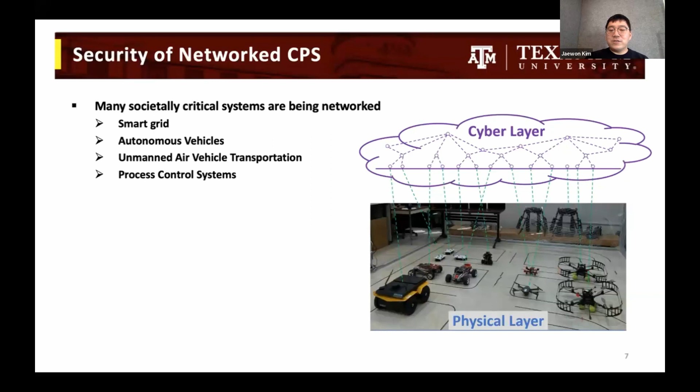So here are some examples of cyber physical systems. For example, autonomous vehicles, chemical process control systems, unmanned aerial vehicles, and even solar PV power systems. Many systems are cyber physical systems. Okay, so security of cyber physical systems. Why is it important? Many societally critical systems are being networked, such as smart grid, autonomous vehicles, unmanned air vehicle transportation, process control systems. They are safety and economy critical. So malfunctioning causes considerable physical and economic damages. That's why security of cyber physical systems is very important.

Actually, there have been many attacks in the real world. The prominent one was Stuxnet, 2010, and Ukraine Power Grid, 2015, Ohio Nuclear Plant, 2003, and Shamoon malware, 2012. So how can we possibly secure cyber physical systems? So here are many recently reported cyber attacks in the real world, such as Stuxnet and Black Energy. Black Energy is actually the cyber-induced power outage in the Ukraine power grid. The attacker used malware called Black Energy. They compromised three power utility companies, leading to power disruption in the region for half of the population.

And most recently, the Colonial Pipeline cyber attack, which is ransomware infection, paid $5 million and increased gasoline prices, something like that. So that's why cybersecurity is very important.

Okay, so abstraction of networked cyber physical system. The overall system has a physical system and actuators and some sensors and some routers and computational nodes, information fusion node, and they are connected over the network. However, some of the nodes may be malicious, may be compromised. So how do we secure the overall cyber physical systems?

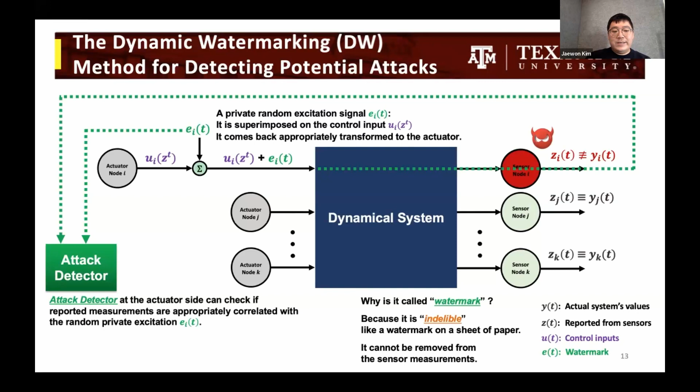So let me give you an example with the single input, single output equation. Here is the system equation with the system noise. So x(t+1) equals a x plus b u plus some noise. And then we are injecting the watermark onto the control input ut. So the new control input will be ut plus et. Then the closed loop equation we can write like this.

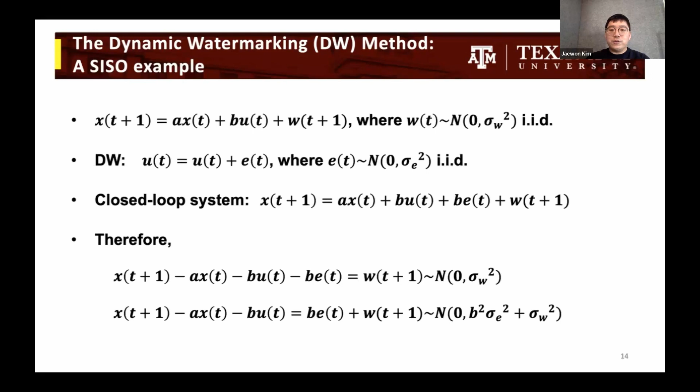And then we can reorganize this equation two different ways. The first equation has the watermark on the left side, and the second equation has the watermark on the right side. So we will use the first equation for test 1 and the second equation for test 2. So like this. In the absence of an attack, the first equation should be equal to the system noise variance, and the second equation should be equal to the system noise variance plus the watermark variance. So if either test fails, then there is malicious sensor information in the system.

So after detecting an attack, the system should go into safety mode: halted, rebooted, manual operation, etc. And there is a trade-off for setting the detection threshold. If we set a high threshold, it will result in more missed alarms, and if we set a low threshold, it results in more false alarms. So we have to carefully choose the threshold setting.

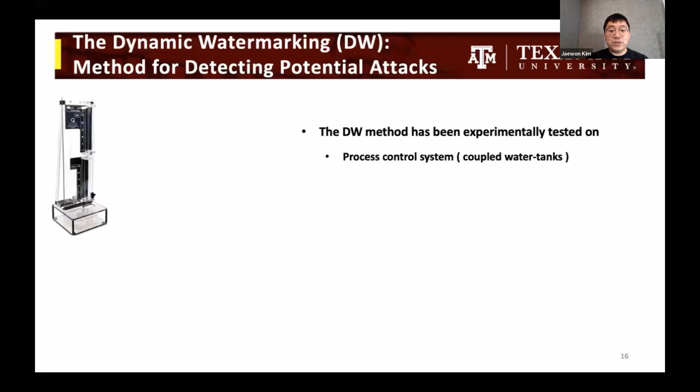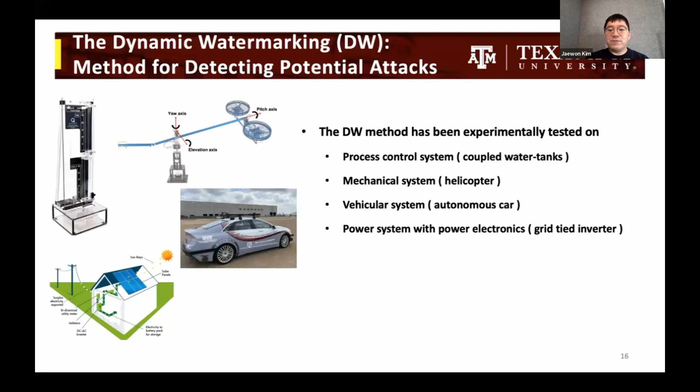Okay, and then this dynamic watermarking methodology has been experimentally tested on process control systems, a mechanical system, in this case a helicopter system, a vehicular system, an autonomous car, and also a power system with power electronics, which is a grid-tied inverter system. The benefit of the dynamic watermarking methodology is that it is a general purpose proactive methodology for defending control systems against any cyber attacks.

Okay, so from now, I'm going to show the experimental test demonstration. First, give me a second. I will talk about why we need experimental testing first. Because experimental testing is very important for this dynamic watermarking method. So why do we need experimental testing? Because dynamic watermarking is fundamentally based on stochastic considerations.

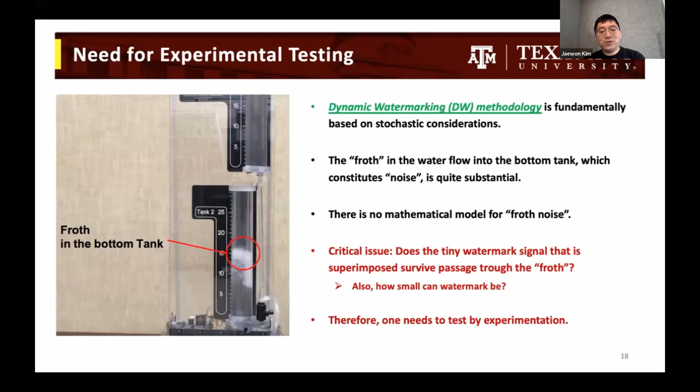Here is the picture from the process control system testbed. The froth in the water flowing into the bottom tank, which constitutes noise, is quite substantial. You can see it in this picture. And there is no mathematical model for this froth noise. Also, a critical issue is, does the tiny watermark signal that is superimposed survive passage through the froth? Also, how small can the watermark be? Therefore, one needs to test by experimentation, not by simulation. And there are also other reasons why we need to do experiments.

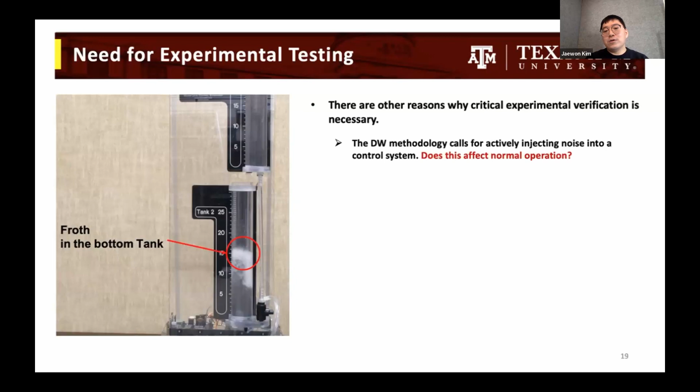First, the dynamic watermarking method calls for actively injecting noise into the control system. We have to check: does this affect normal operation? And also, the lower the variance of the signal employed, the longer potentially is the time to detect an attack. So what is the trade-off between missed alarms and false alarms? And what is the detection delay?

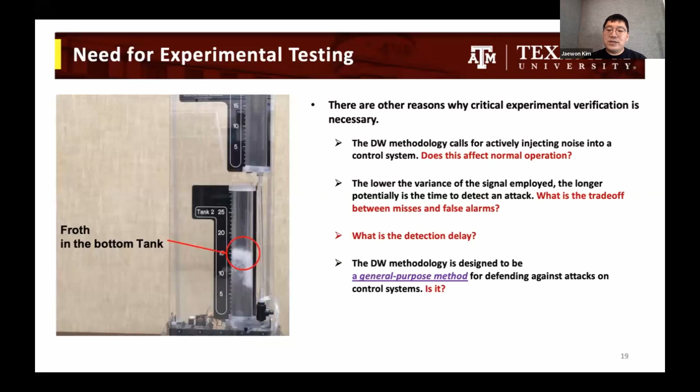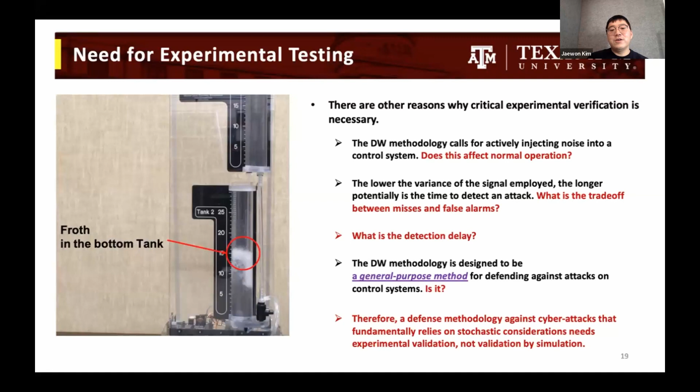And the dynamic watermarking is designed to be a general purpose methodology for defending against cyber attacks, any attacks on a control system. So we have to check: is it general purpose? Therefore, a defense methodology against cyber attacks that fundamentally relies on stochastic considerations needs experimental validation, not validation by simulation. So that's why experimental validation is very, very important.

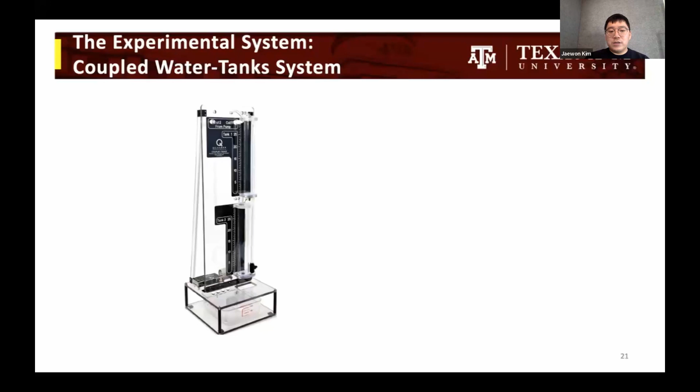Okay, so the first example I'm going to show is the process control system. The experimental testbed is a coupled water tank system. Two tanks are coupled, and there is a water pump here. The water pump feeds into tank 1, which in turn feeds into tank 2. So input water flow goes to tank 1, and tank 1 feeds tank 2. The testbed controller is designed to regulate or track the water level in tank 2.

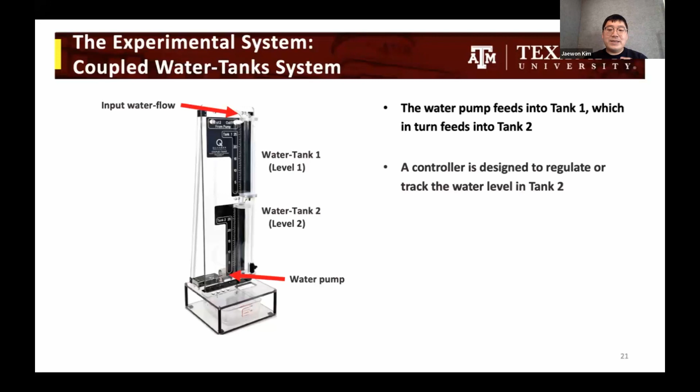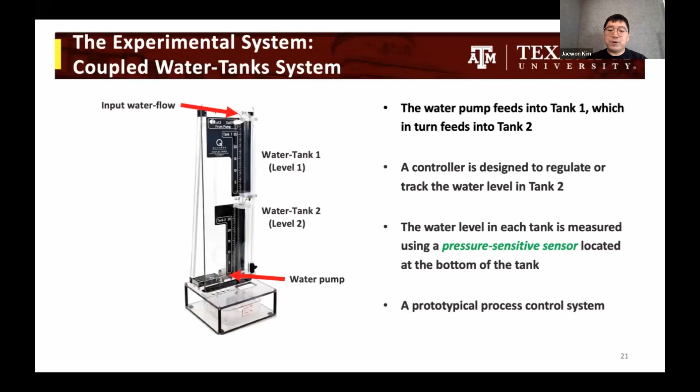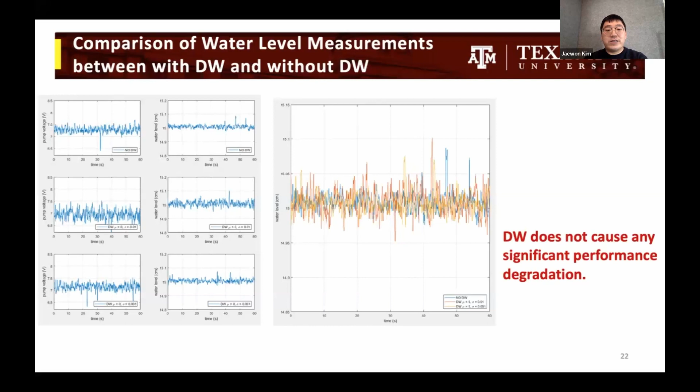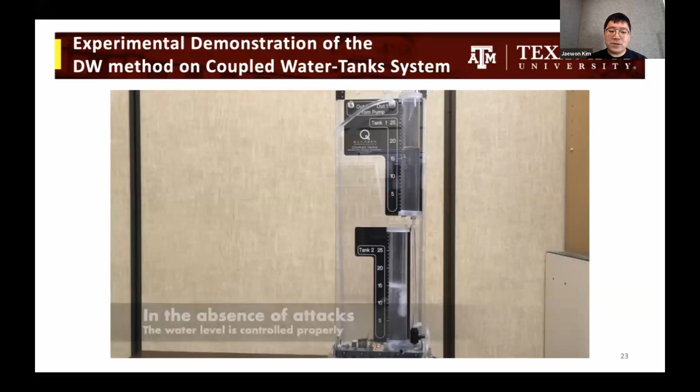And then here is the video I'm going to show. So we are right now initiating the plant. The set point is 15 centimeters at the bottom tank. In the absence of the attack, the water level is controlled properly. And then the attack happened here, but the system doesn't know without any defense methodology.

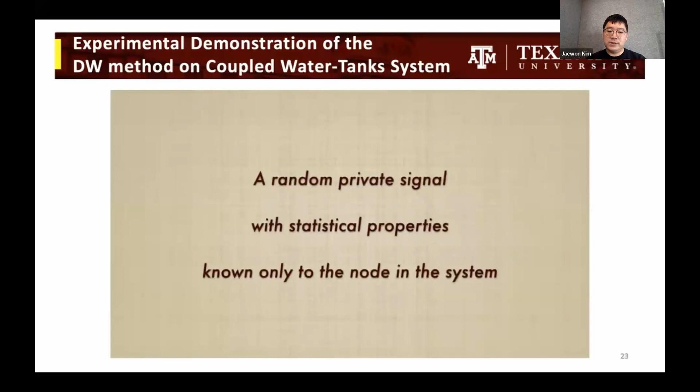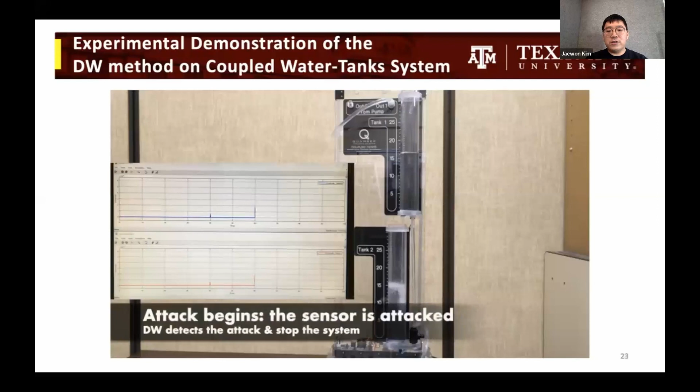And then dynamic watermarking test 1 and test 2 are running in real time here. Once the attack is detected, we stop the whole plant and drain all of the water for safety.

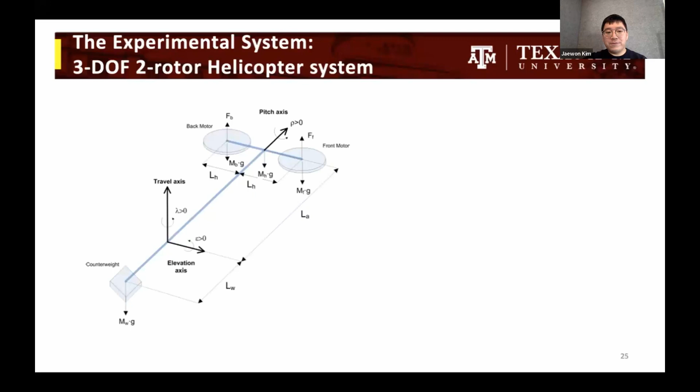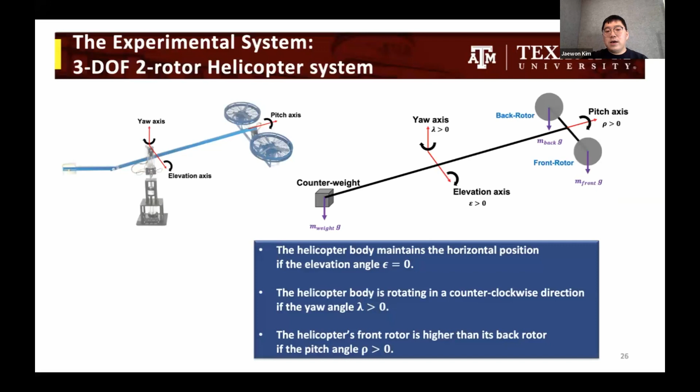Okay, second example: we tested on a two-rotor aerial vehicle flight control system, consisting of two rotors, a front rotor and a back rotor, which is exactly the same architecture as the Boeing CH-47 Chinook helicopter. It has 3 degrees of freedom: pitch axis, elevation axis, and yaw axis. And we attack the elevation measurement.

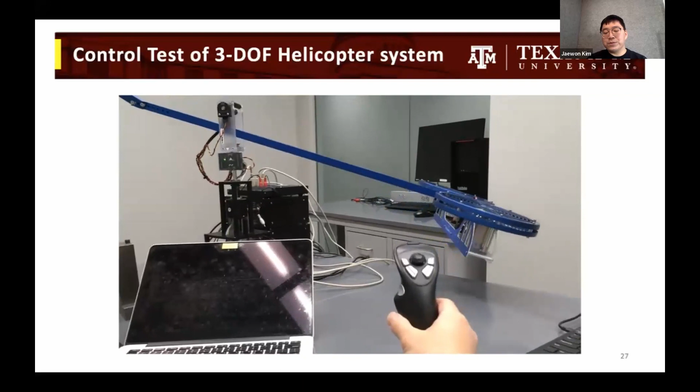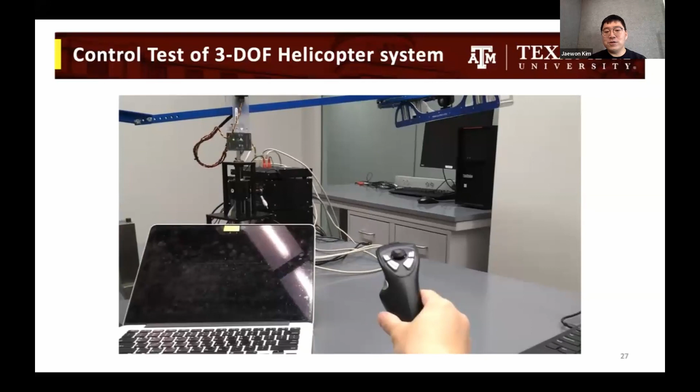Before we attack, we tested with manual operation, with manual control input. We connected a joystick to test the manual control input to the plant. Then we can understand how much input is needed for the helicopter. Something like this, then forward, then backward, then takeoff and landing. Yeah.

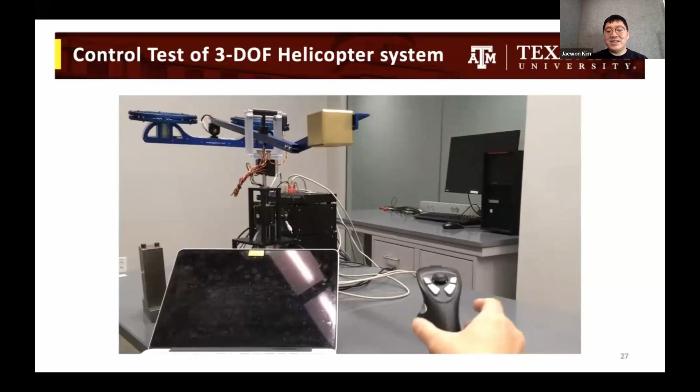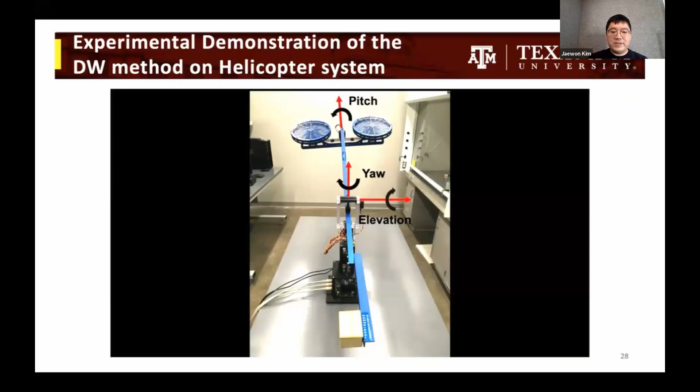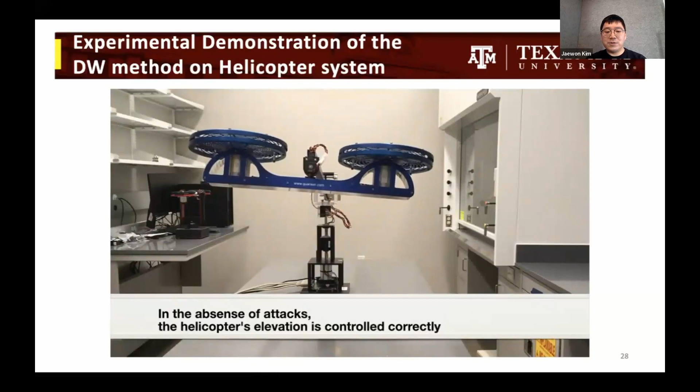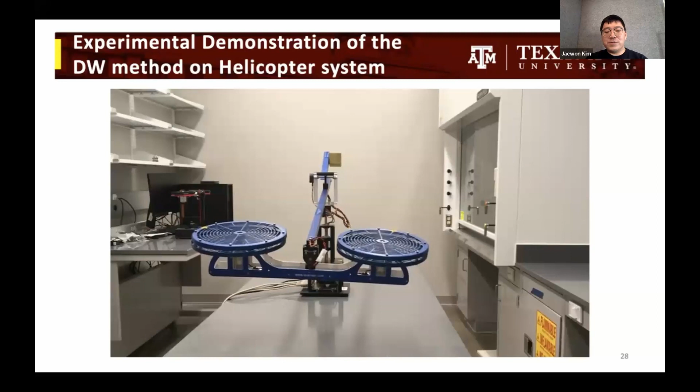And then after that, we set the trajectory for the helicopter mission, and then attack and defense. So here is the autonomous trajectory for the helicopter, and we keep monitoring the elevation measurement. In the absence of the attack, the helicopter is running properly. And the malicious sensor is causing system instability like this, all because of malicious sensor information.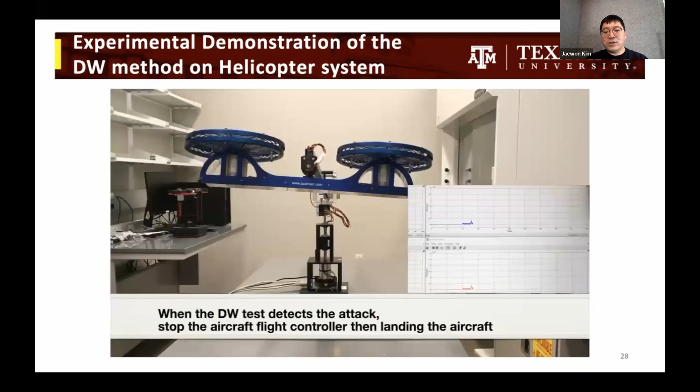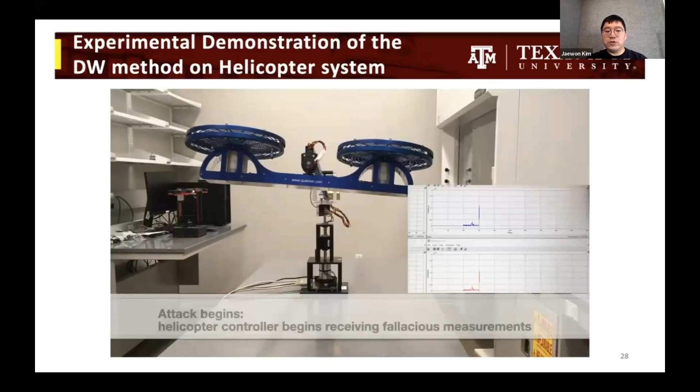And now dynamic watermarking test 1 and test 2 are running in real time. In this case, once the attack is detected by the attack detector, we have to switch to the landing controller for safe landing. We cannot stop the helicopter in the middle of the air.

And after this, we also tested on an autonomous vehicle, the Lincoln MKZ, which is a commercial vehicle, and we changed it into an autonomous vehicle. This was done with the mechanical engineering department at Texas A&M University, and it is called the TAMU Autonomous Research Vehicle. It has a drive-by-wire system, and we attack the yaw rate sensor measurement.

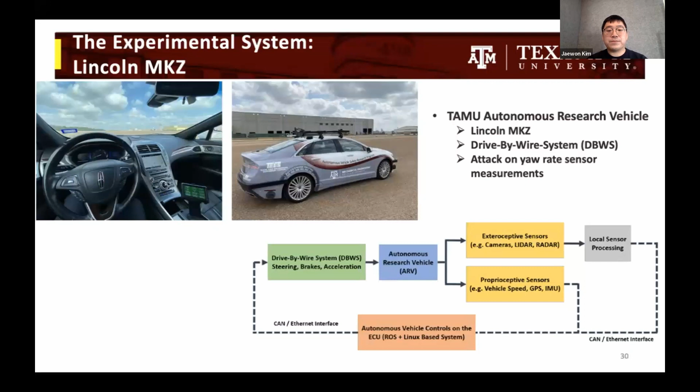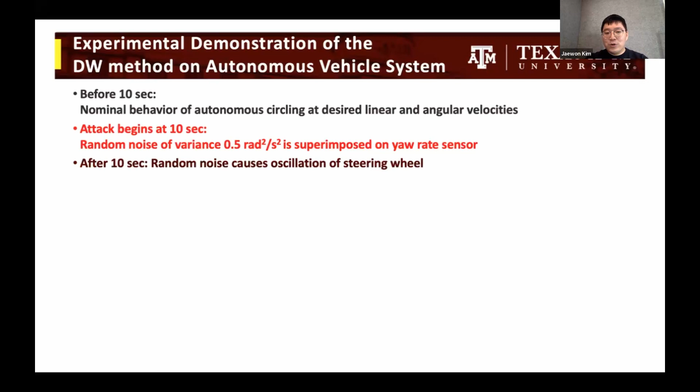So the attack scenario is like this. Before 10 seconds, it's normal operation: we set the trajectory, which is circling at desired linear and angular velocity. At 10 seconds, a random noise with a variance of 0.5 rad squared per second squared is superimposed on the yaw rate sensor. After 10 seconds, you will see small oscillations on the steering wheel.

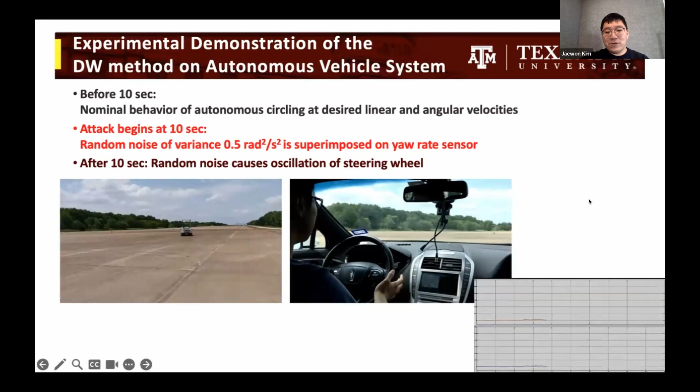Here is the video of the outdoor view and indoor view. The driver is still sitting in the driver's seat. This is the autonomous vehicle. For safety, the driver is sitting in the driver's seat for emergencies. So here is the video. Right now, this is normal operation, making a circle.

And then you can see here oscillation. And then dynamic watermarking test 1 and test 2 are immediately detected.

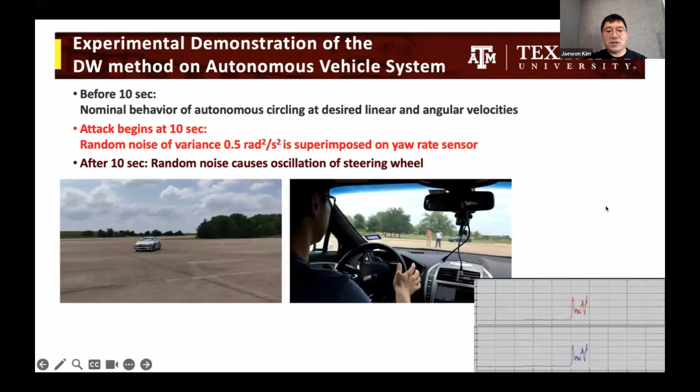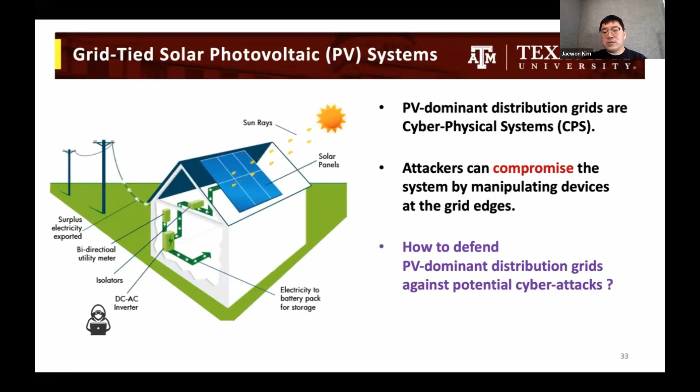Okay, so after we test the autonomous vehicles, and this is my ongoing project. So we are trying to secure the energy system. So the test bed is defending against potential attacks on grid-tied solar PV power distribution system. So PV dominant distribution grids are also CPS. The attacker can compromise the system by manipulating devices at the grid edge. So how to defend PV dominant distribution grid against potential cyber attacks? So that's the motivation. And then we test it in the lab first.

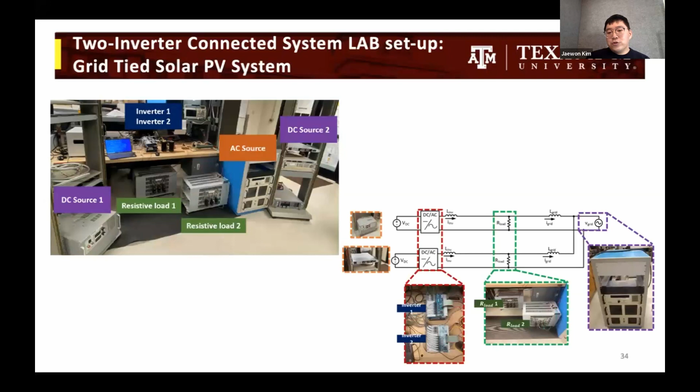So through this experiment, we can actually detect the attack. Also, we can identify the attack location as well. Which is very important because if there are 100 homes connected to the same grid, we have to know which home is under attack. So dynamic watermarking can detect the attack, and we can identify which home is under attack. So that's why dynamic watermarking can be used anywhere.

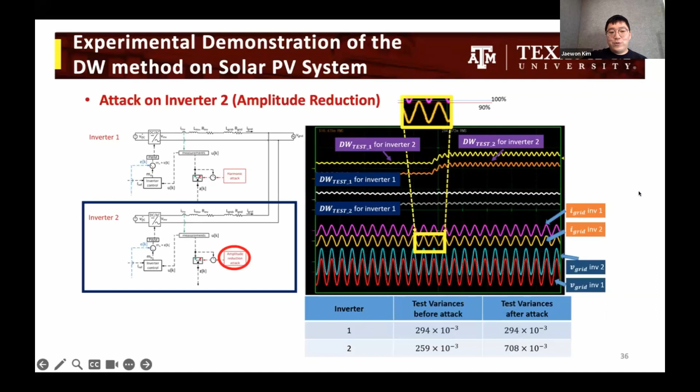And then this is an ongoing project, a huge contract, a DOE funded project. Professors Dr. Kumar, Dr. Enjeti and Dr. Le Xie, we are working with them. And actually, after we tested in the lab, we have an industry partner, which is CenterPoint Energy, and we visited their actual solar farm. They are providing energy to the grid using the renewable energy source, which is a solar farm. I visited and I talked to them as well.

And yeah, they have 3 solar farms. The first one is called Oak Hill Solar Farm. It's 8,000 solar panels, 2.5 megawatt solar inverter, and the solar field has 2.7 megawatts. And they have Volkman Solar Farm. Volkman has energy storage as well, so ESS means energy storage. And then Troy Solar Farm, they have 150,000 solar panels, which is providing 50 megawatts.

So right now I am testing this dynamic watermarking methodology on the real solar farm, which is my current project goal. My current project ends at the end of the year. So this is year 3, so we have to test in the real world control system, which is the solar farm. So maybe in the near future, in a few months, I will implement it in the solar farm, and maybe I will let you guys know as well.

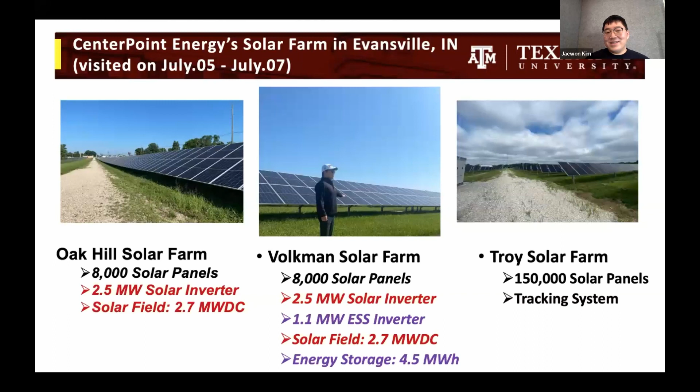Then this was when I was at TAMU, I was working on some TurtleBot and some cars and drones and Jackal, some robotics. Yeah, that's the end of my presentation.

I actually have a question to start off in that case. I did see you talk about the cybersecurity testing with the Lincoln car, right? Yeah. You did say that in the ideal scenario for dynamic watermarking, when you find an attack, you want to stop the system. Yes. So how does it work when it's in a self-driving car? Because you may not want to just stop the system in that sense. So I'd divide my questions into two parts. One would be, how did you run it when you had the experiment? What happened when you detected the attack? Did it just disengage, or was this carried out offline with records from the car?

And my second question would be, how do you see this extending to a real-world cybersecurity system where just turning off the system or just stopping the system may not be the right safe step to do? Yes. So you are asking about the mitigation plan after attack, right?